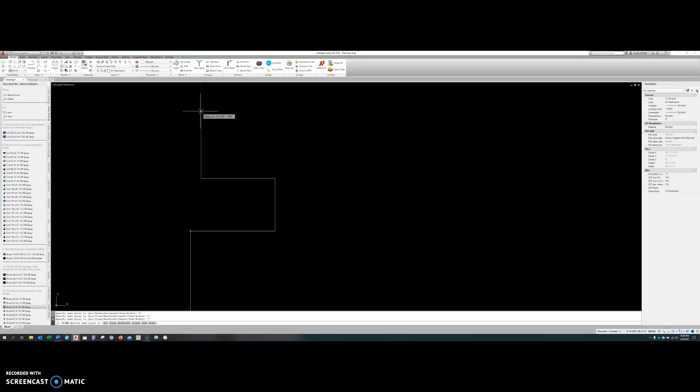This is how, with a single polyline, I can start doing realistic measurements of objects. So let's say this was a patio, I just drew what the patio is. Then escape to exit.

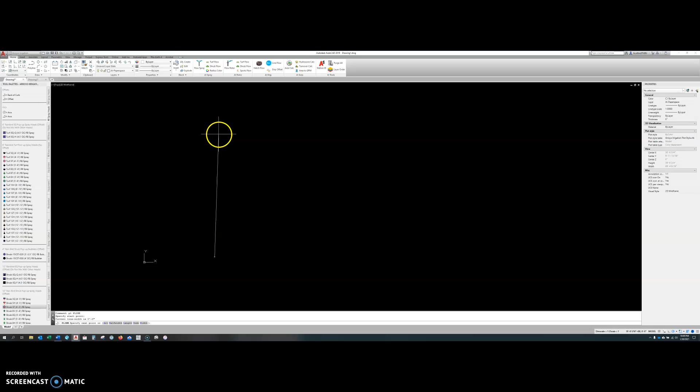A couple things I want to show you guys with this: as you can see when I'm drawing, if I draw over here it's kind of free moving, but then you see if I'm straight up every 90 degrees, essentially straight at 0 degrees, 270 degrees, 180 degrees, and then 90 degrees, I have this dashed line that shows up.

That dashed line is called the polar line. You can turn polar on and off with this button over here for polar, and you can see it will change colors when I hit the F10 key on the keyboard. It went from blue to gray, so it's off now. You can see if I go straight up, there's no more polar line. If I turn it back on, it almost kind of sticks there.

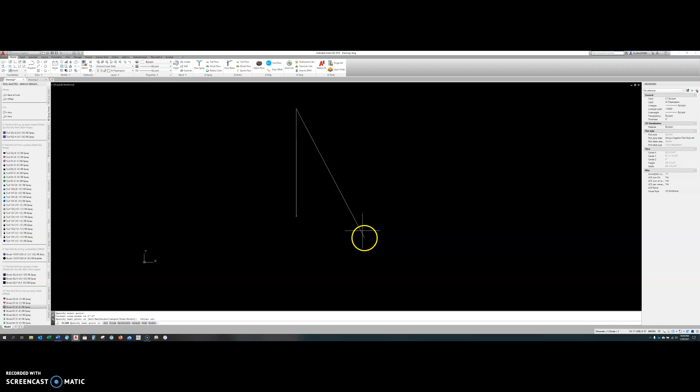This helps you draw straight lines, as a lot of times we're drawing parallel and perpendicular. These tools help you stick to it, so it helped me stick to there. And then if I wanted to make a complete rectangle, for the most part everything is 90-degree angles.

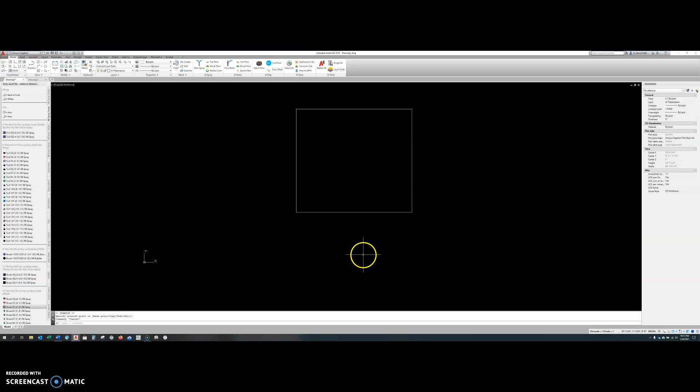Another item that is extremely useful is called Osnaps. You can toggle it with the F3 key, that is this item here. You can see it go on and off, light blue, dark or light blue, and then gray. If you click on it, here's the quick selects, or you can go to object snap settings. This dialog box came up, and now I have object snap enabled, and there's a bunch of different things we can have enabled.

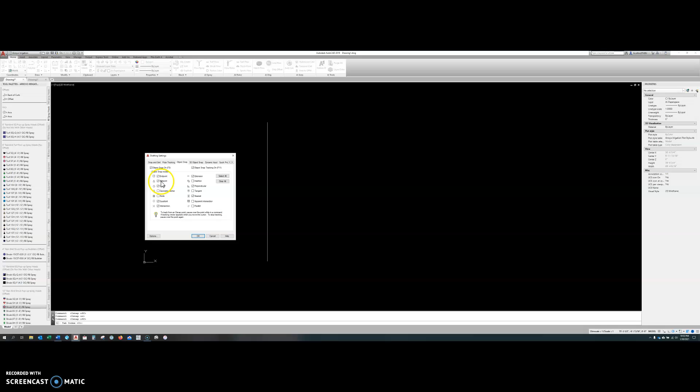I like to have the endpoint, the midpoint, the center of a circle, a quadrant, an intersection, an extension, a perpendicular, and nearest on. That helps me speed up my drafting. So I'll show you right now.

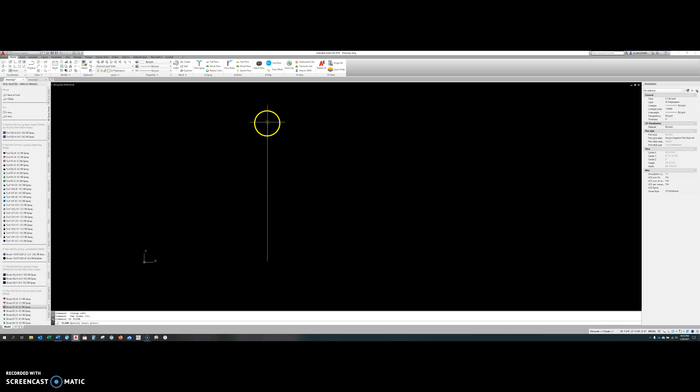So when I have my osnaps on, which they are right now, you can see at the end of my cursor, when I'm at the endpoint of the line, that box shows up. That box is the symbol indicating it's snapping to the very end of the line, so I can pick up essentially where I left off. Now let's say I want to go from this end. You can see here, I get to the end, it turns to the box, and I know I've reached the end of the line.

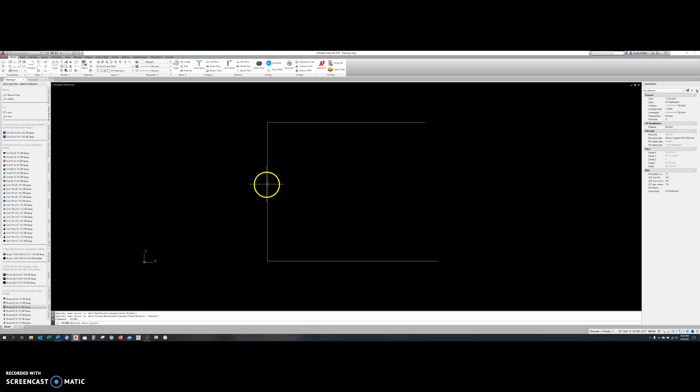Now let's say I want the midpoint of the line. If I drag down towards the center, now the triangle shows up in the middle. So if I click that, now I have my midpoint on.

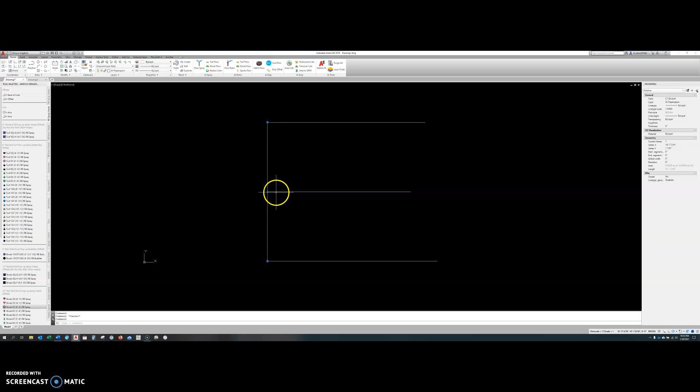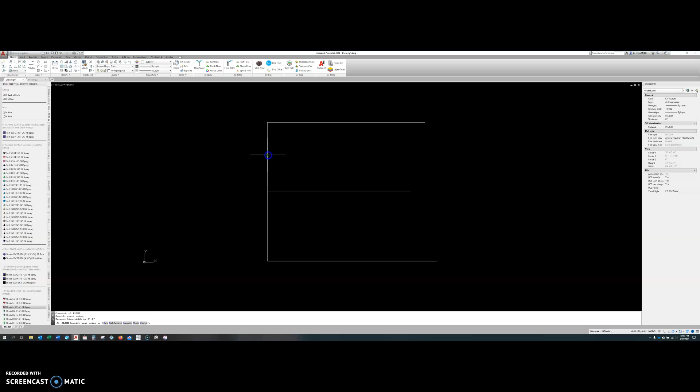If I highlight it now, you can see out of the vertices I have my endpoints and the midpoint, and that's where it snapped right to. The other one you could see, as you trail, looks like a little old style timer, where the sand fell through. If you click there, it just allows you to select anywhere on the line, actually touching the line, not one side or the other, it's actually connecting there. And then I've made my point.

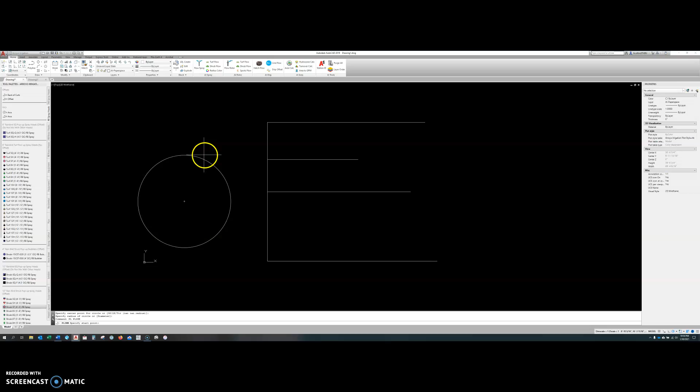Then the other osnaps, so I'm drawing a circle, which we'll get into more later. But let's say I wanted to find the center. So I drag my cursor to the edge of the circle, and you can see it highlights in the center this cross, and then it turns into a circle.

So then that is now the center of the circle. You can see here that point is following the nearest, but as soon as I get to the quadrant, which is 0, 90, 180, and 270 degree markings, it turns into a diamond, and it allows me to choose that exact point.

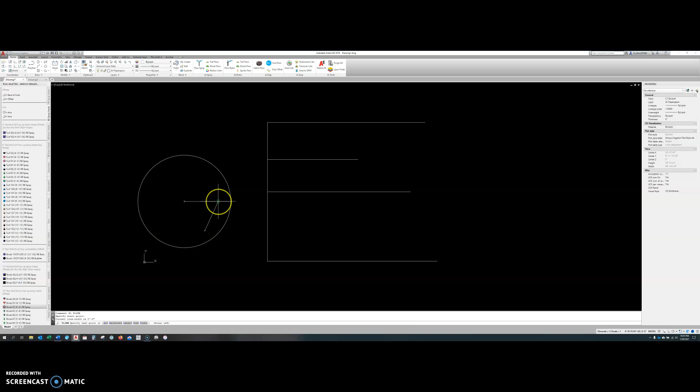Now let's say here I want to come through and draw a line perpendicular. I'm going to turn my polar off. I'm on nearest right now, but I want to do something perpendicular, so that's midpoint. But then when I get here, it almost looks like the UCS icon. Now I know I'm perpendicular, and that is then osnapping to perpendicular.

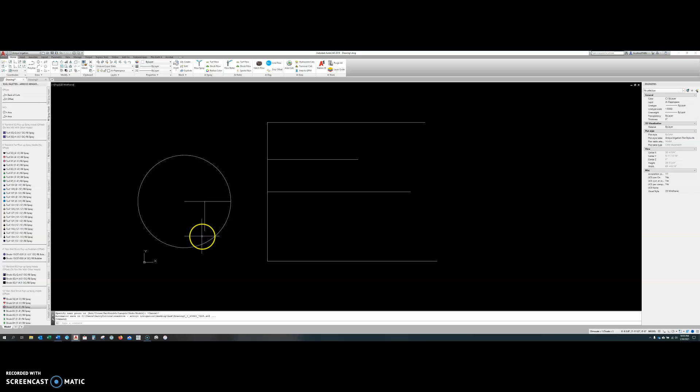So those are the main snaps. I encourage you guys to try them out. These really help because you can see here, that's right on the line. It allows for clean drafting instead of coming through. If I didn't have my snaps on, I might be over the line or under the line, and now I have gaps, and this leads to problems in drafting.

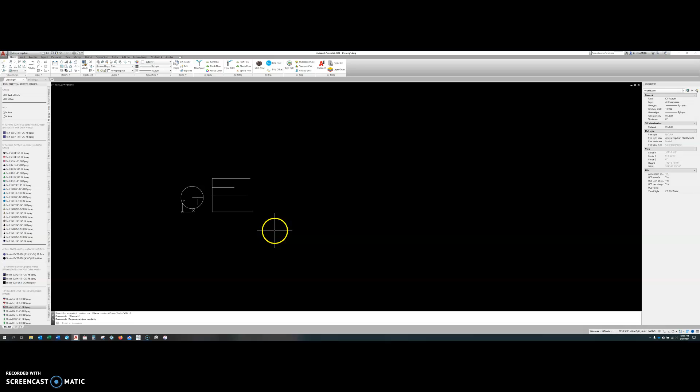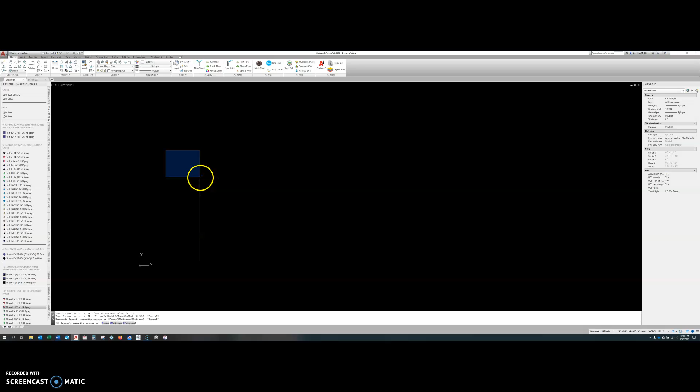Okay, so we talked about snaps, and we talked about polar. Let's talk a little bit quickly here about selection. So if I use my left click and do a quick single click, I'm not holding it. If I drag from the left to the right, you'll see a blue selection window. And then if I click it again, nothing is selected because I didn't have the whole item selected.

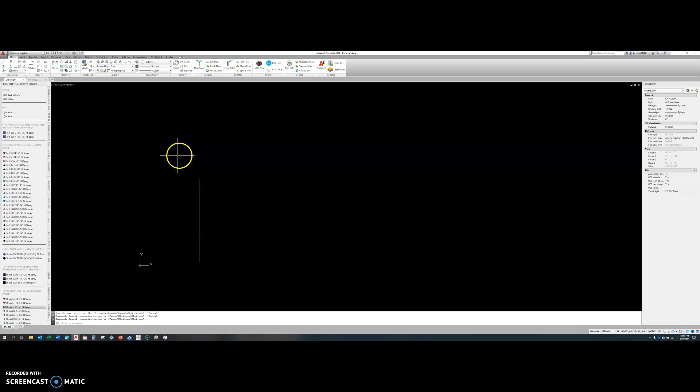So if I want to select that object, I left click again, and then I drag my mouse. Now that I'm selected all the way around the object, if I click again, now it selects it. And I could delete it, hit the delete key to delete it.

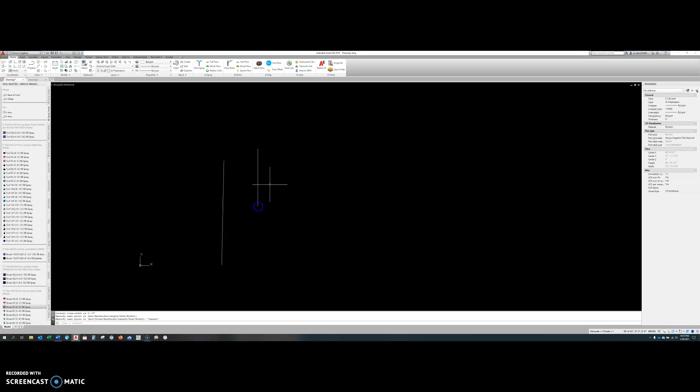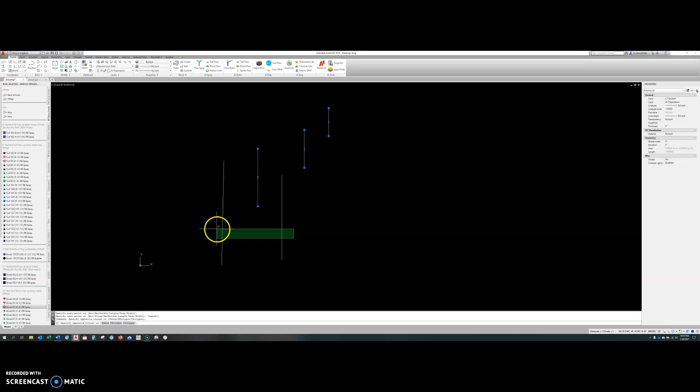This becomes useful when we have a bunch of different objects. So I'm going to come through and select, and let's say I only want to select this one and this one, but not this one and not this one. I come through, and even though I was touching these two, because that window went around only the full item on this one and this one, it selected those.

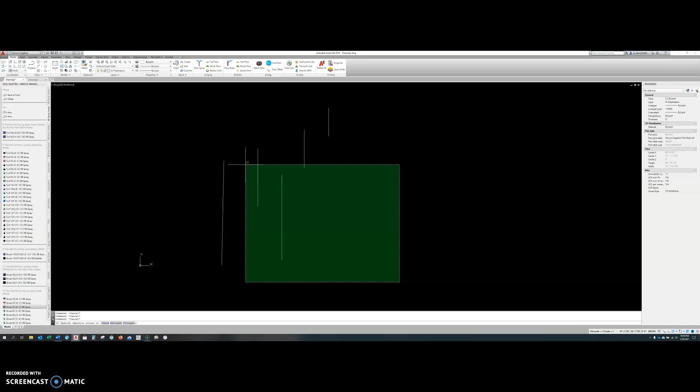Now, vice versa, if I left click and then drag from right to left, the opposite, any item that it touches at all will be selected, no matter how much of that item is selected. So you can see these top two ones will only be partially selected, or partially in the window over them. But then when I click, because it was selected going from right to left, and you saw that green window, then anything that is touching that window is then selected.

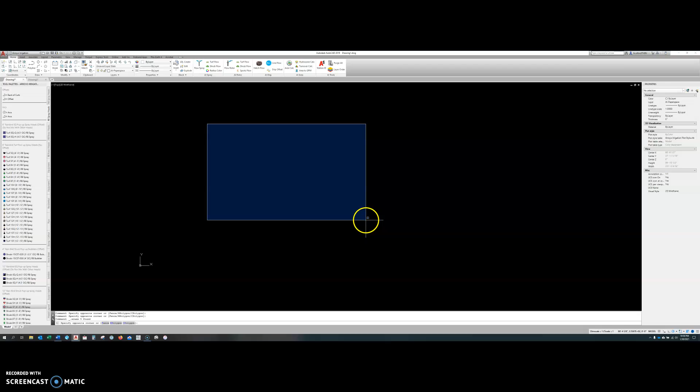So left to right, the whole item has to be within it, and it's blue. And then from right to left, it turns green, and anything that it touches is then selected.

So let's see, what else? Quickly, if I want to get rid of something, I can select it and simply hit the delete key. It's the fastest. Or if I draw something, I can then type in E for erase, and then select it, and then hit enter or spacebar, and it goes away.

So now we've talked about polar, osnaps, selection, and deleting items. And in the next video, we're going to talk about copy and pasting.